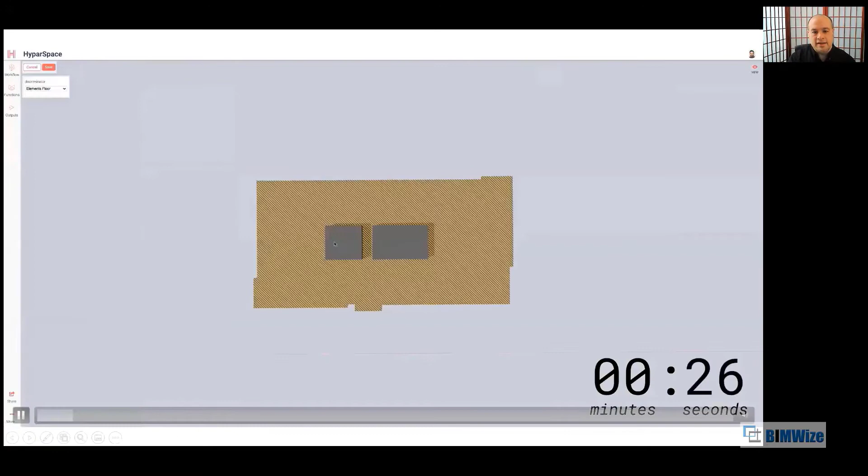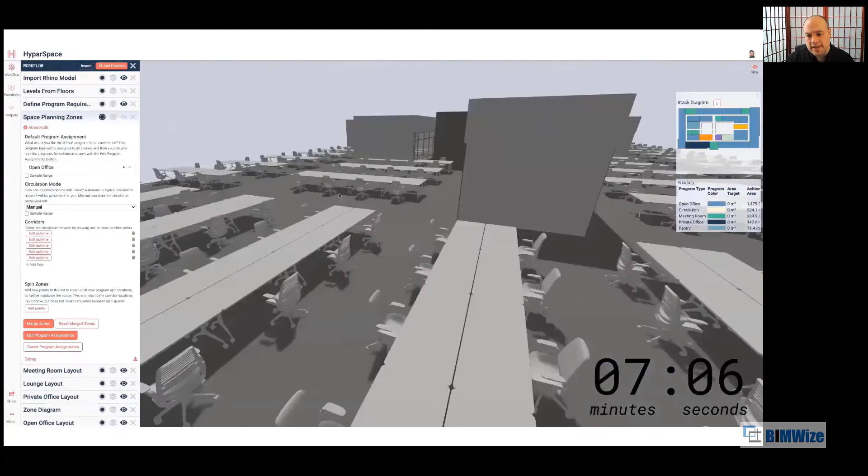So I mentioned HyparSpace earlier - this is a time lapse of HyparSpace. This is one of our engineers creating an office plan. Now, what you're seeing on the left, opening and closing there, is a whole stack of individual little things we call functions that are doing different tasks. One of them is laying out each of these rooms. This is something that we have pretty good data on by talking to a lot of firms - somebody usually takes a week to get to, and our engineer got there in 9 minutes.

So this is the kind of thing we want to make possible. There's really no reason that developers should be waiting 6 months on designers for a development project or a set of proposals. We want people to actually concentrate on what's important here - not making sure that every room has a desk, but that it actually has the right one, or that we've got the right distribution of rooms and the right distribution of areas according to the client's need, for example.

Now, this is something that people can use today. I won't promise that you can do it in 9 minutes - obviously one of our engineers has spent a lot of time on this. But when we concentrate on this and then given tests by different firms, you can come up with 4 or 5 proposals in a morning. And a typical figure that we hear from them is we can get 3 proposals to a client in 2 weeks.

Now, there is a point at which clients are going to realize that it shouldn't take 2 weeks. But on the other hand, there's no reason the firm should have to take 2 weeks on this kind of proposal, because there's so much more to do after this point. Why can't we just get to this point where we can bring the client to a decision as quickly as possible where they're satisfied, and we can move on to the important work of saying how we're going to build that thing.

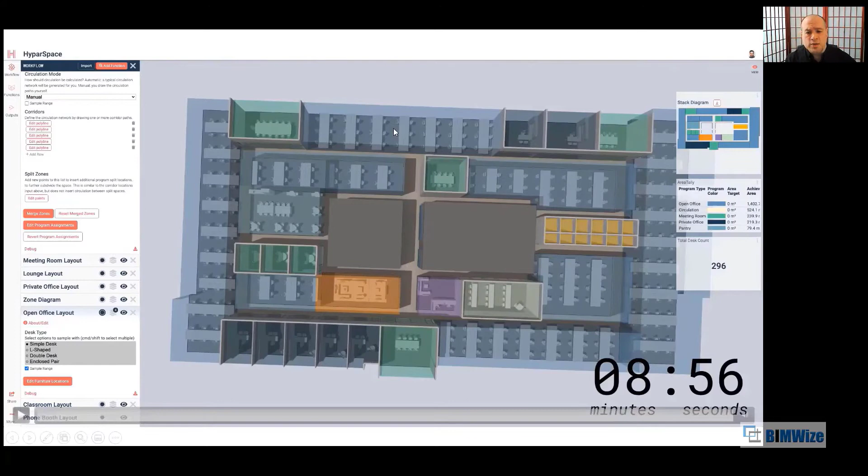If you would like, you want to indulge me in a couple of other examples? Sure, I can show you.

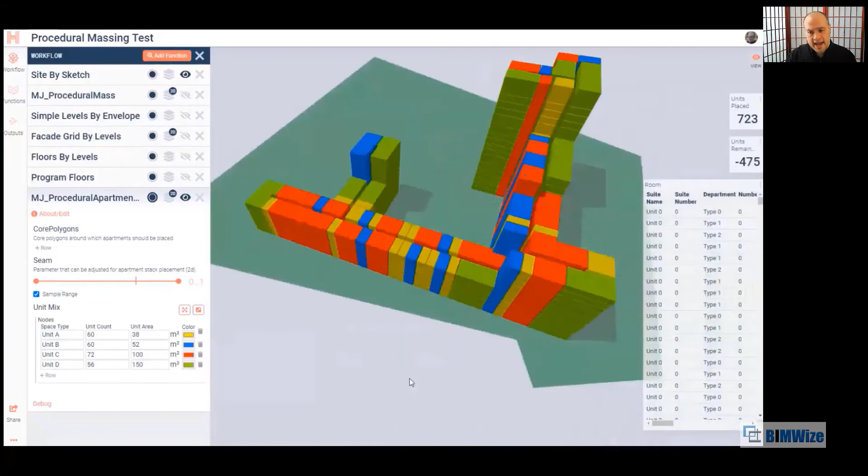He didn't have to write things like how to get the site, how to put levels in it, how to put a facade on it, or how to put floors in. He just had to add two more things, which was really the important part: setting up different options for unit distribution and different envelopes that these units could fill.

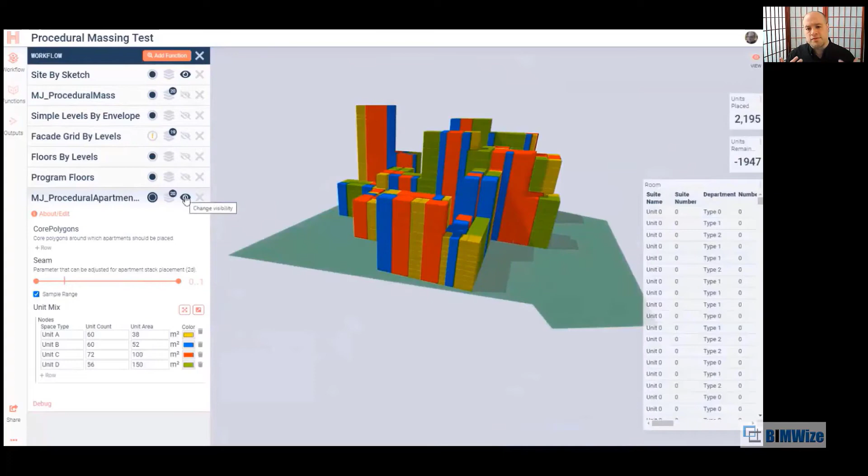So this is the real design work. These are decisions that need to be made, not like where do I put my levels, right? So what we see is the possibility for the industry to stop treating every project as if it's brand new.

On a blank tabula rasa that they have to fill with their genius. There is a lot of genius out there that should be served, but it's not served by diverting it into mundane tasks. Making the decision about the best distribution of apartments, that's a human decision, a value system brought into the project that the designer is trying to capture.

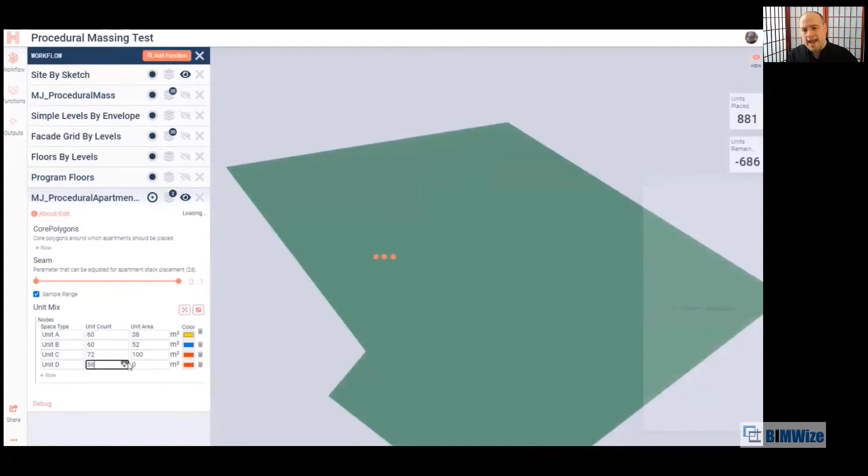We're never going to capture a complete value system inside a computer program. We always need humans to decide what's best. That's what we're trying to give people the tools to do - give them an opportunity to examine lots of options fast, understand what they mean, and make a good decision.

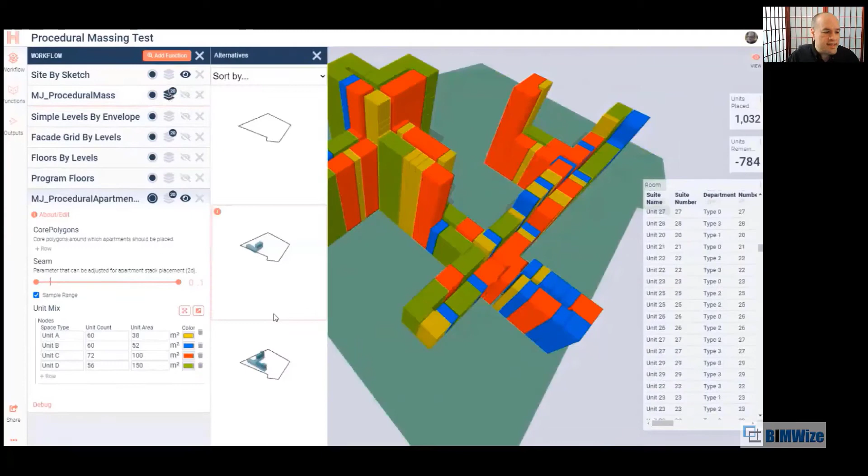So we do things like this. I've shown a couple of architectural examples. Things that I can show from actual customers are static, but more complex.

We work with a building product manufacturer on roof drainage systems, and we've worked with them for about a year and a half or so. This particular type of drainage system is extremely complex from an engineering standpoint because it's siphonic - there's a vacuum that has to be maintained, et cetera. I never thought moving water off a roof could be this complicated, but it turns out it is.

The market condition they were looking at: a 30% year-on-year growth in logistical buildings in the EU. They look at how many engineers they have to design these systems before they ship, and then look at that growth curve - we're not going to grow our engineering team 30% year on year, even if we can find the engineers. So we have to automate.

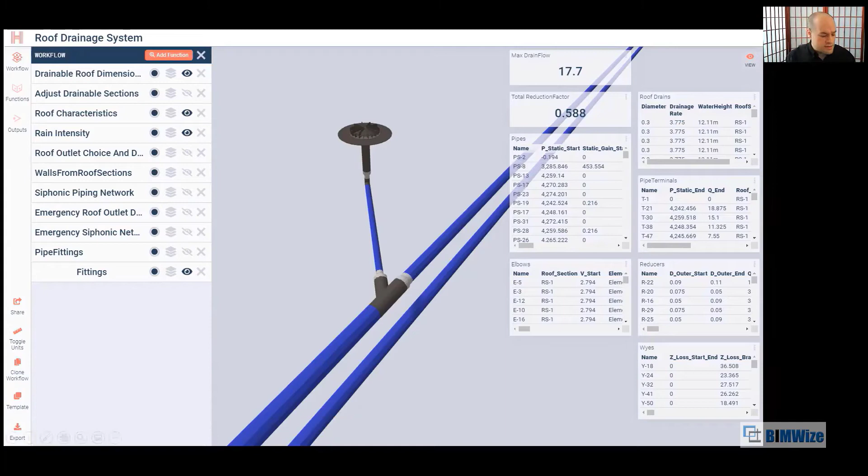Another firm described themselves as, we build shoe boxes with structure and then we chamfer them sometimes for the site - this is a warehouse manufacturer. These are types of buildings put together by rote. They have a speed aisle for the forklift, a certain aisle width related to the racks on which the goods are going to be.

These buildings are springing up worldwide, especially given the pandemic, where they've been given jet fuel because everybody's shipping everything now. This kind of thing is not something people should have to spend a lot of time on.

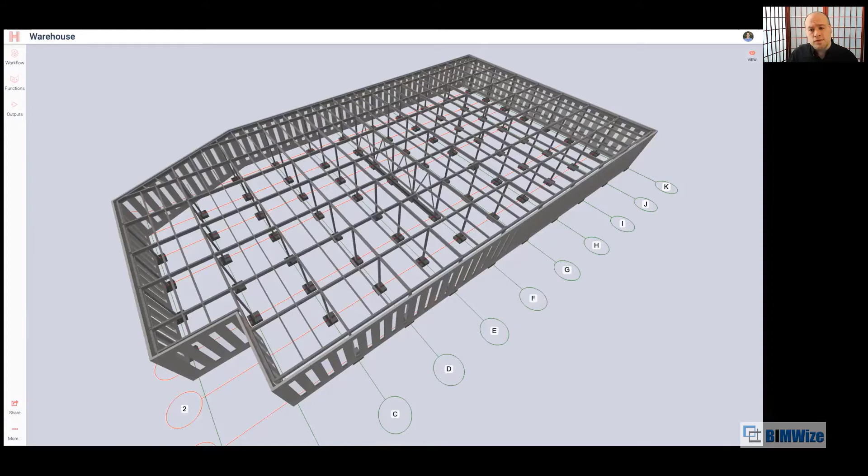On the other end of the spectrum, we're working with a large construction company, and they had a simple goal: we want to reduce waste on the gypsum wallboard we use on projects. Here's our usual figure of waste, and we want to cut that almost in half. Can you help us?

This is where we get into scaling up the expertise, because this firm has a person who's been doing this for a quarter century and is very good at it. There's one of him, and he will retire. So what they're saying is, can you give us a safety net for our younger project managers so they can run a program, find an optimal distribution of this material, and that way they're not constantly having to call this guy to see if it's okay.

These are the kind of things computers are very good at, and only very experienced humans are good at. A lot of people listening, as I did as a young architect, had the experience of the gray-haired guy coming by and glancing at your desk - back when we were all drawing on boards - putting his finger on something and saying 'gonna have a problem there,' and then walking away.

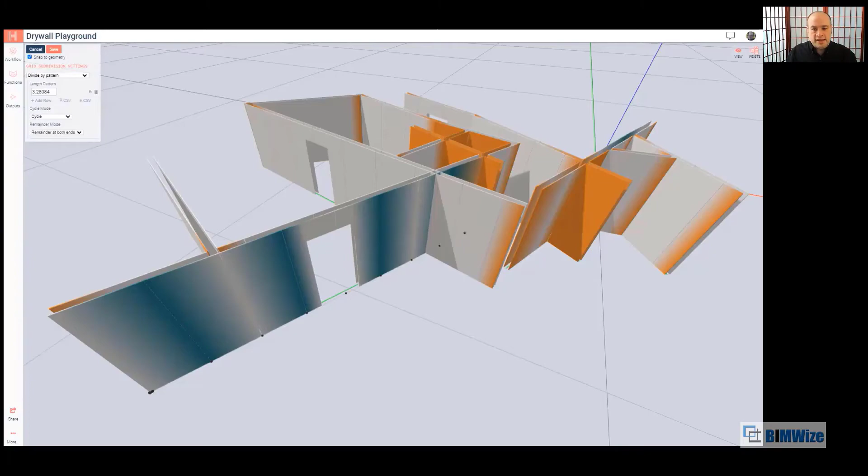So those kinds of things that become available just by working in 3D, we want to take one step farther and make that more nitty-gritty, intuitive expertise available to everyone so we can scale it up. Because experts don't know how they do what they do - unless you make them think about it.

For example, with this piping customer, we talked to two engineers who work there and asked, how do you decide to do this or that? We got this thousand-yard stare from both of them as they realized they don't know. They went off on a six-week quest, literally, to turn into mathematics the way they do it. Then they had to test it against past jobs just to make sure the formulas they'd come up with actually exhibited the same behavior as the decisions they had made in the past. So this is not easy for anybody to get new expertise onto the platform.

But once it's there, once it becomes more widely available, it's available, and we don't necessarily have to constantly recreate it, which is what's happening in our apprenticeship and professional lives - we're constantly recreating this intuition in people. We think that if at least the basics are there, and you can give people feedback on whether they've made a good decision or bad, you can start building up that intuition much faster.

I have a friend in telecommunications, and at the extreme end, he describes the process of laying out antennae on a tower. The design software comes up with a solution for all the antennae, the engineer moves a couple of antennae around, the software tells him how the engineer made it worse, and then the engineer puts it all back and hits print. It's kind of a bleak existence for that engineer.

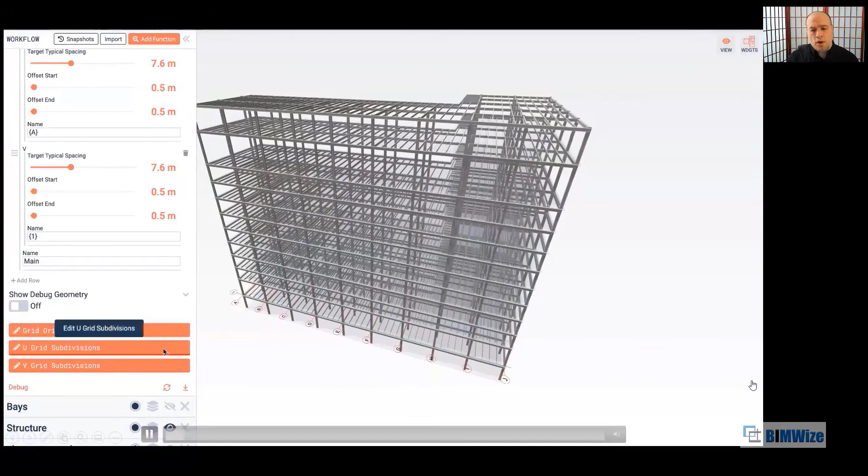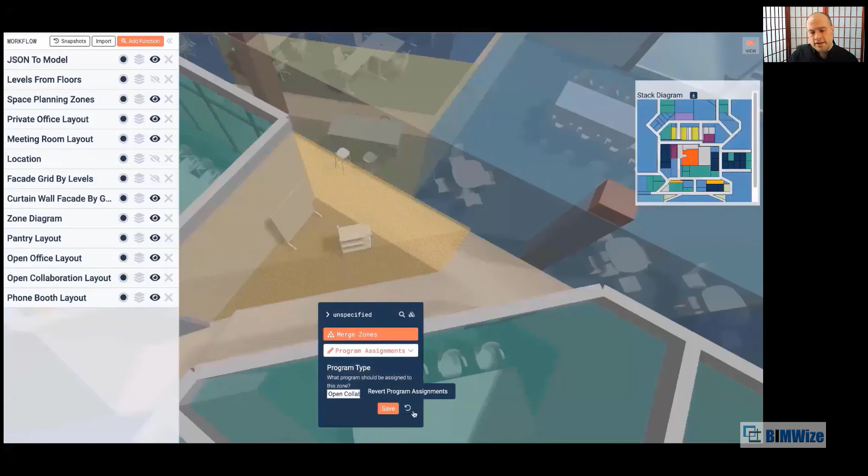One of the things we do that's unique is we also let people edit the results and preserve them through subsequent generation cycles. So people can generate a layout of rooms, but then intervene and say, no, I don't want that room to be that function, or those structural columns to be there—I want them over here. I can intervene and start shoving furniture around the way I want it.

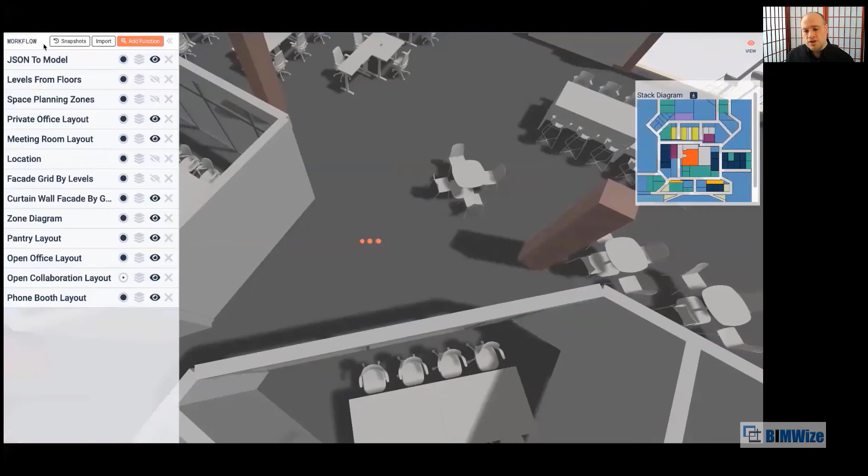But the automated part of this process is still there, and you haven't broken it. That's something we think is unique on the platform, this ability we call overriding—basically you're intervening into an automated design to make human adjustments, but you don't explode the rest of the automation and have to start over again.

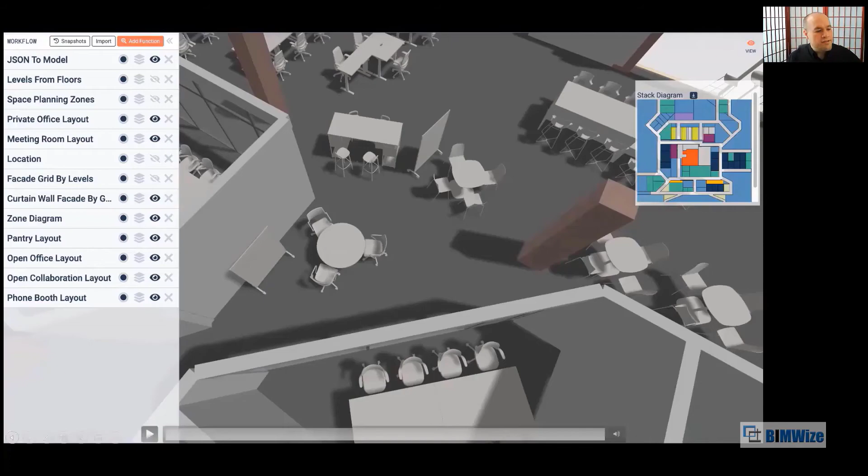One phenomenon we noticed in the industry is people would come up with incredibly elaborate visual programming in Grasshopper or Dynamo, dozens of nodes and hundreds of wires, and it would really work for a project, really save time. Then on the next project they'd start from a blank sheet again and build another many-dozens-of-nodes, many-hundreds-of-wires thing, because the previous one just needed one adjustment and it was really, really hard to do without breaking everything. And starting again—a lot of people have had this experience.

So this combination of automating something into a sensible solution that you can then intervene on for circumstances that only humans really know about and the algorithm doesn't—that's the special sauce on the platform that makes it a building decision platform. It combines the best of what automation can give us with the safety of human judgment, engineering, design, and production methods to make sure we've accounted for the entire situation.

So my last question: right now Hypar is integrated with Revit. Are you planning to develop your plugin enough that it can integrate with other BIM tools too? You can actually drag and drop Rhino files right into Hypar right now. The most requests we get are to integrate with Revit, and we are considering an even deeper integration.

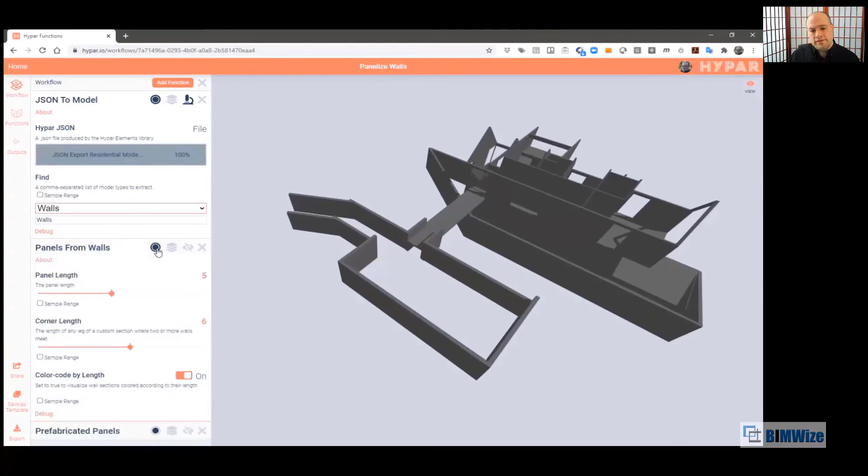Those of you who use Revit are very familiar with this house. What we've done here is previously exported that model with a Hypar add-in, which is free, and brought it into the Hypar environment. There are two more functions here doing two things: the first is panelizing the walls according to a bunch of input parameters, and the second is actually doing the framing in each one of those panels.

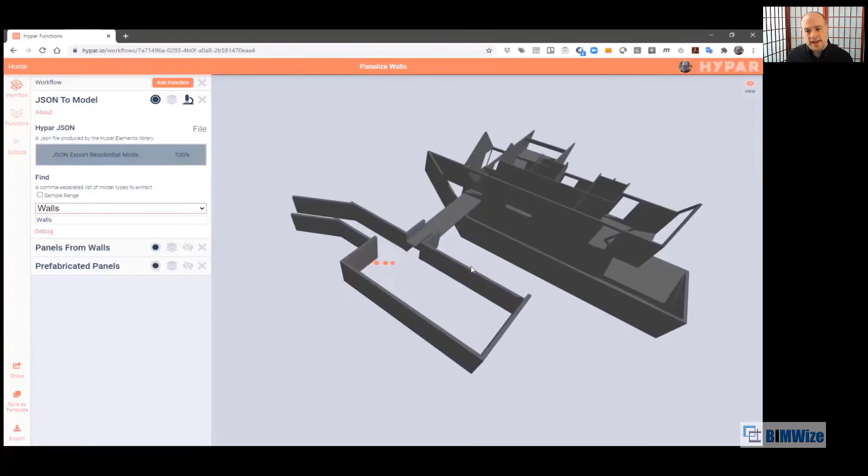I think this is actually real time—it might be sped up at 1.5 times or something. But what you're seeing is this is a task that might take somebody a morning to figure out, and it's done in seconds. There's really no reason humans have to sit around figuring out how we're going to actually frame this panel.

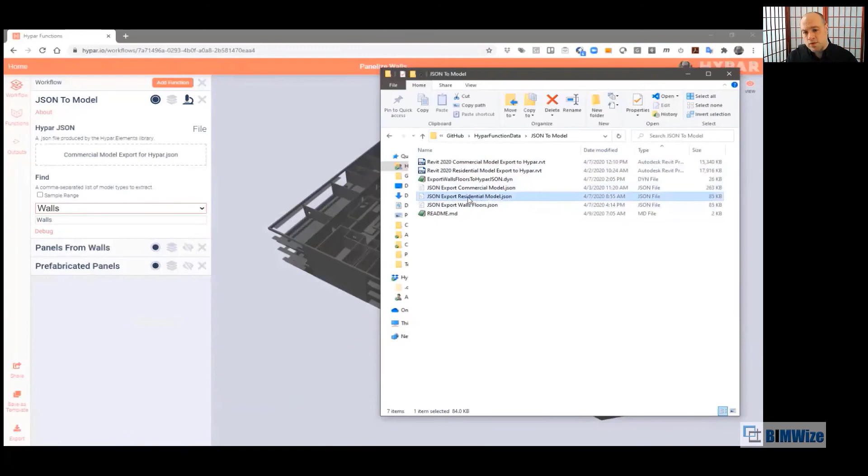What they might want to do is intervene in here, which they could do and change things. But we have a clear understanding that people start with context coming in from other applications, so we bring in DXFs as well, for people who want to use CAD, etc. We also export Revit models, SVGs, images, and so on. So we're well aware that we exist inside an ecosystem of software, and we want to make it as easy as possible.

Like any software company, we respond to substantial requests, and Revit and AutoCAD have been the most requested, so that's where we put our energy. But we had several situations where it made a lot of sense to work with Rhino, and we do.

Let's get to the next section of our discussion, which is the impossible questionnaire. I was looking forward to this one, because I've been totally blown away with the philosophy and everything you guys were talking about. I was feeling like the kid in the room who understands something but has a lot of questions. However, now I'm going to make you feel like the kid in the room, and ask some really difficult questions. If you answer that, you're a genius—there's no gift hamper here.

But you would earn a lot of respect.

Okay, so my first question is, what is the melting point of aluminum? Believe it or not, I actually used to know this. Is it somewhere around 1700 degrees? Give me an answer in Celsius, not Fahrenheit. Oh God, okay, give me a Fahrenheit then. Let me try to do a conversion in my head. I'll say 1500 Celsius? No, it's 658. 658 degrees Celsius.